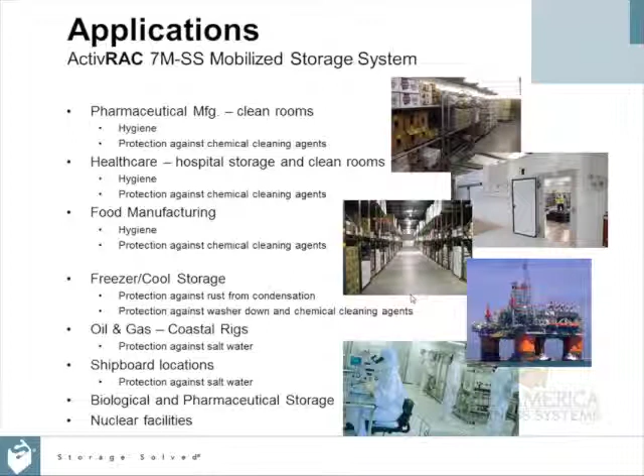In coastal locations, coastal oil rigs and gas rigs, as well as shipboard applications, ActivRAC stainless steel provides protection against rust when exposed to salt water. Biological and pharmaceutical storage and nuclear facilities are also potential applications for the ActivRAC stainless steel product.

The new ActivRAC 7M stainless steel product offering has similar product specifications as the current steel ActivRAC 7. Therefore, the carriage section maximum weight capacity remains at 7,000 pounds. You can continue using existing shelving, racking, and drawer systems, and the current standard floor specifications and height limitations still apply. Please note, at this time, surface mount and recessed rail are the only two stainless steel rail options available for ActivRAC 7M.

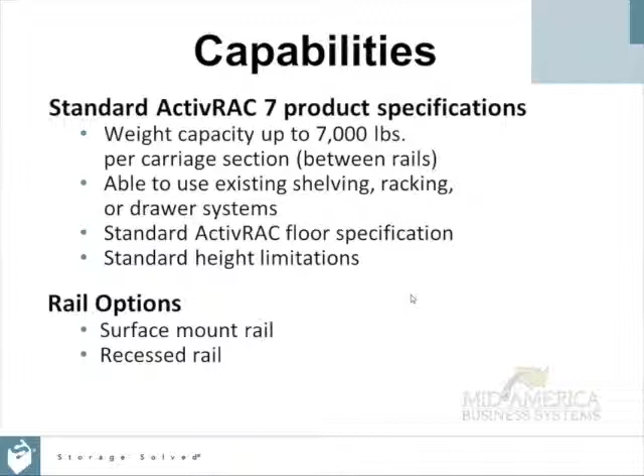The size and weight capabilities for the ActivRAC 7M stainless steel will remain the same as the current ActivRAC 7M product line. Just as a reminder, here are the current carriage parameters for the ActivRAC 7. Carriage depth is 15 to 60 inches. The carriage length begins at 3 feet and ends at a maximum length of 33 feet 6 inches.

Carriage weight capacity, as mentioned before, is 7,000 pounds per carriage section with a maximum carriage load of 24,000 pounds. All the previously determined single and double rail skip requirements apply as well. Remember, when determining load capacities, you must include the weight of the carriage and racking in your calculations.

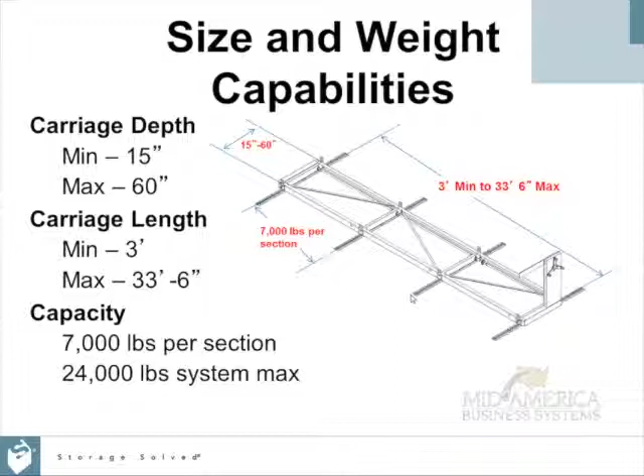Top mount rail, also known as surface mount rail, is installed on top of the concrete floor. This rail has a 3/8 inch high, 4.5 inch wide profile with a beveled edge on each side. In stainless steel applications, this rail will be manufactured from 17-4 precipitation hardened, otherwise known as age hardened, material. This rail is also considered ADA compliant and is designed to operate under heavy, long-term, and cyclical stress loads.

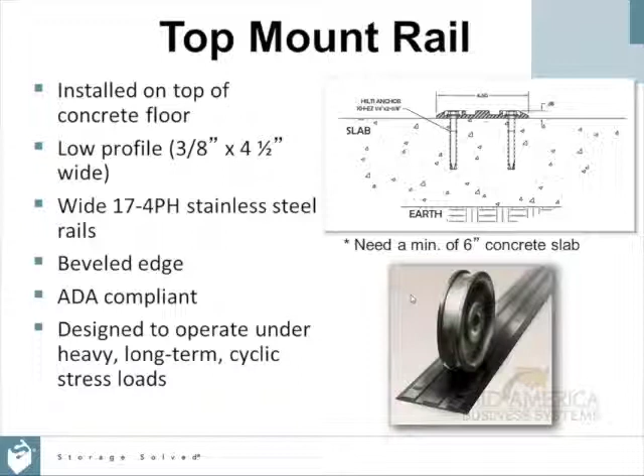The sketch in the upper right-hand corner of this slide shows the installation of the surface mount rail. As shown, we recommend a 6-inch minimum concrete base and the use of 1/4 inch diameter by 3 5/8 inch long hex washer head KH-EZ Hilti concrete anchors to secure the rail to the floor.

Unlike the surface mount rail, the recessed rail option is installed recessed in the concrete with the top surface of the rail flush with the surface of the concrete slab. The rail profile itself is 3/8 of an inch thick and 4 inches wide. This rail is also manufactured from the same 17-4 PH stainless steel material.

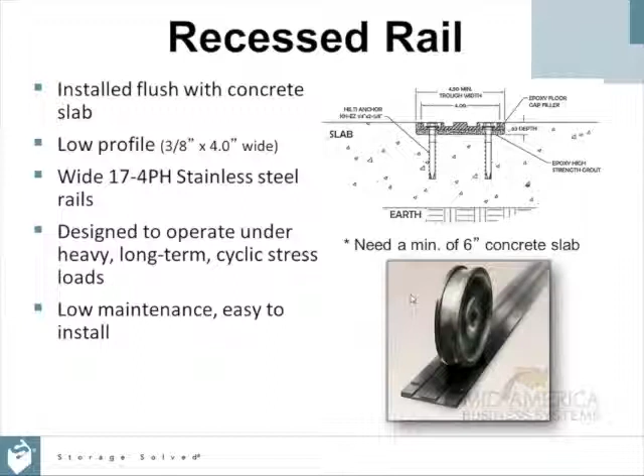The sketch in the upper right-hand corner of this slide shows the installation of the recessed mounted rail. As shown, we recommend a 6-inch minimum concrete base and the use of 1/4 inch diameter by 2 5/8 inch long hex washer head KH-EZ Hilti concrete anchors to secure the rail to the floor. For specific installation instructions on either of these rail options, please refer to the installation instructions posted on SpaceNet 2.0.

Carriage base components. ActivRAC 7M stainless steel has the same construction as the current 7M product, except now being manufactured from 300 series stainless steel. The primary components are 12-gauge uniframe wheel assemblies, diagonal cross bracing, 10-gauge side profiles, 5-inch diameter dual flange drive wheel assemblies, and 11-gauge tubular drive shafts. All of these components are manufactured from 300 series stainless steel.

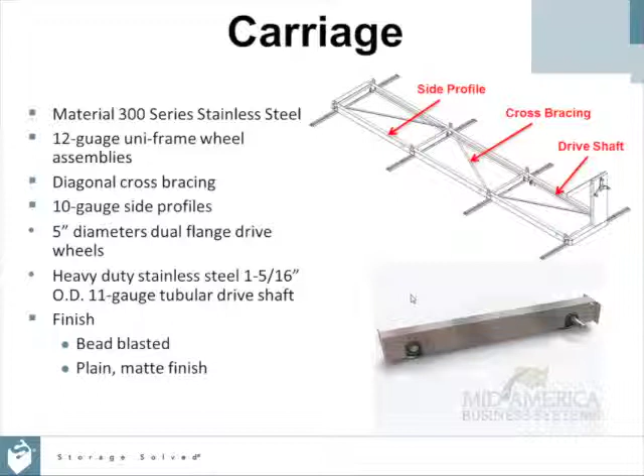The ActivRAC 7M stainless steel product line will not have powder coating. The carriage assembly will be plain. The material surfaces will be bead blasted, which will provide a uniform, plain, matte surface finish. The ActivRAC 7M stainless steel will have the same 3-spoked handle and anti-roll system as our current mechanical assist carriages. The entire stanchion enclosure will be manufactured from 300 series stainless steel. The enclosure will also be bead blasted to achieve the same plain matte surface finish. All sprockets, chains, and anti-drift mechanism components will also be manufactured from stainless steel.

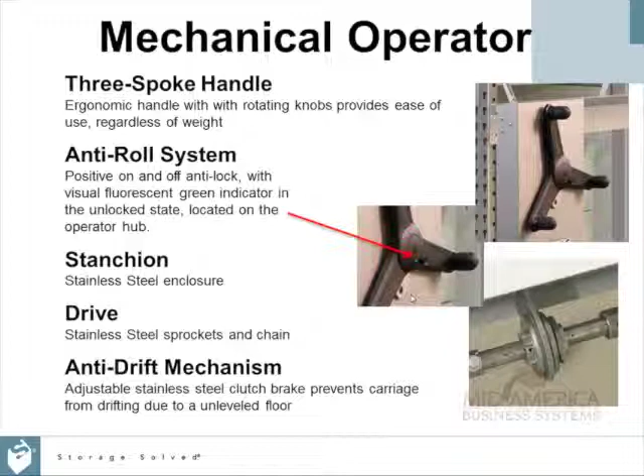Benefits. The two most important benefits of having a stainless steel 7M product line are increased corrosion protection and medical hygiene. The corrosion-resistant properties of stainless steel help protect our systems when they are installed in areas of high humidity or with exposure to salt water. To protect against harsh cleaning chemicals, stainless steel provides protection against most acids, alkaline solutions, and chlorine-bearing cleaning chemicals. As it relates to medical hygiene, the pharmaceutical, medical, and food industries prefer stainless steel as it's easy to clean and maintain.

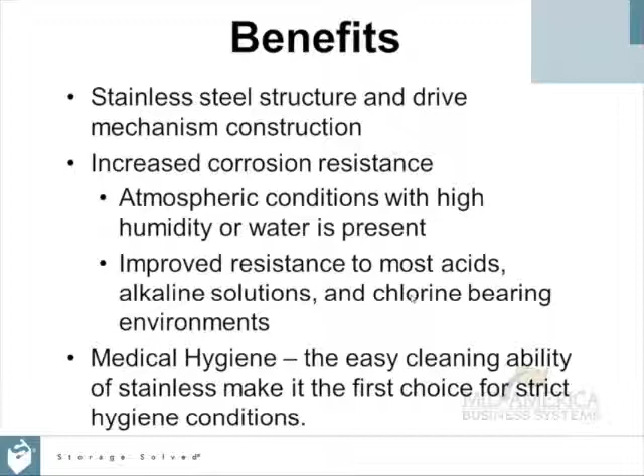Configura. Drawing a stainless steel carriage system in Configura is as simple as one click of a button. After you have opened Configura and entered the first ActivRAC drawing tab, you will need to choose the carriage type. In the carriage type field, you then need to select the 7 button to activate the ActivRAC 7 program functionality. Notice when you select the ActivRAC 7 button, the standard and stainless buttons now become active, and you may choose whether you want a standard steel or stainless steel carriage. When you select the stainless button, you are ready to begin drawing the carriage in stainless steel.

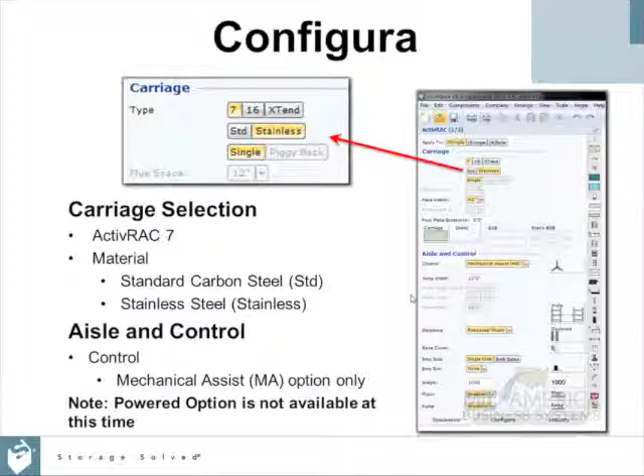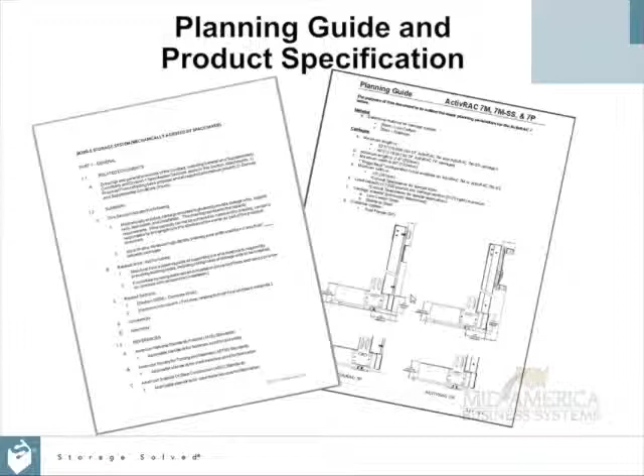To help plan, specify, and train your customers on ActivRAC 7M stainless steel, we have created the following collateral, all of which is posted on SpaceNet 2.0 in the document library. We have updated and created the ActivRAC planning guide and CSI product specifications. We have 2 types of commercial and industrial tech data sheets available. One set of tech data explains the ActivRAC carriage system as a whole, and the others explain the surface-mounted and recessed rail options. For a general product overview, we have made commercial and industrial info sheets available.

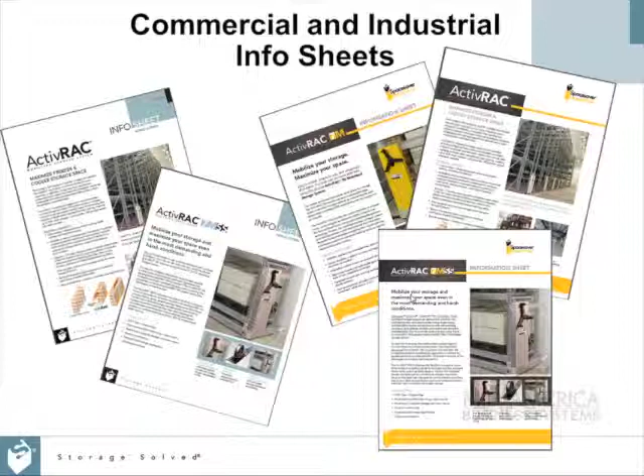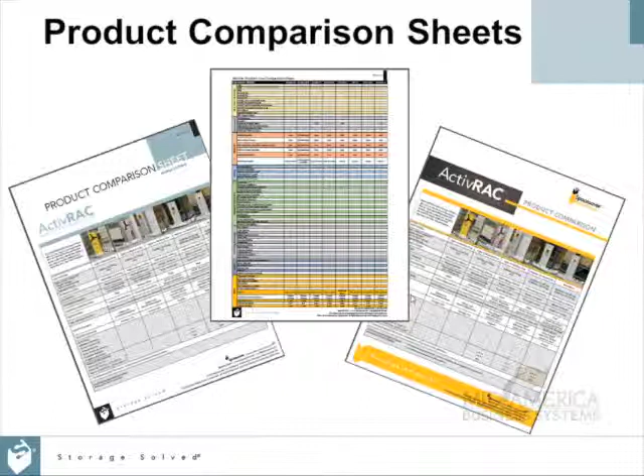These info sheets also include information on how to maximize your freezer and cooler storage space. Finally, we have also updated the mobile product comparison sheets. These sheets will help your customers understand the difference between our mobile product offerings. This ends our training presentation on the ActivRAC 7M stainless product.